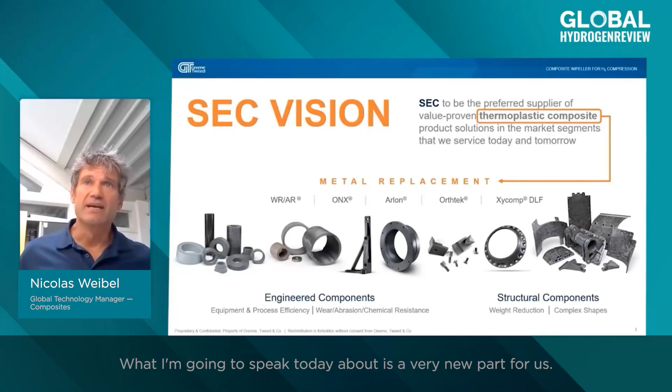I'm going to speak today about something that's a very new part for us. It's an impeller for a centrifugal compressor.

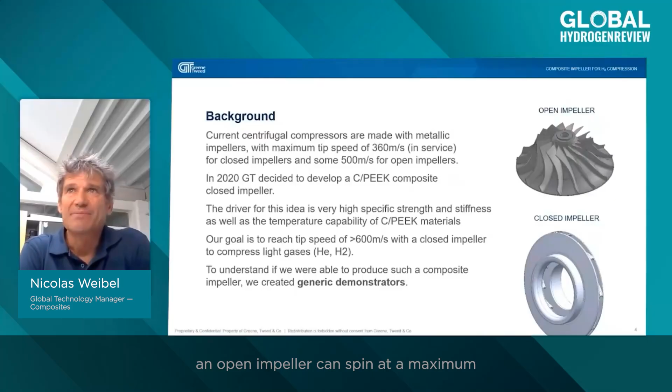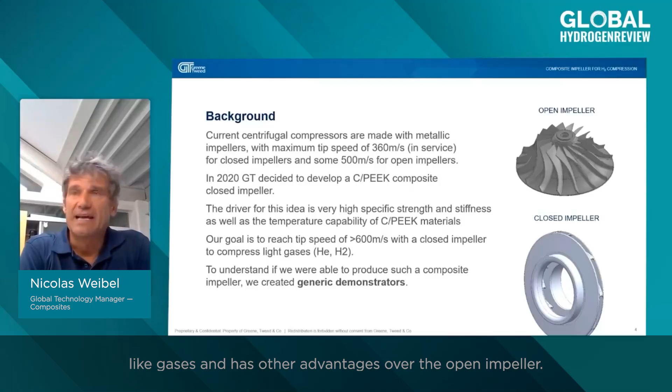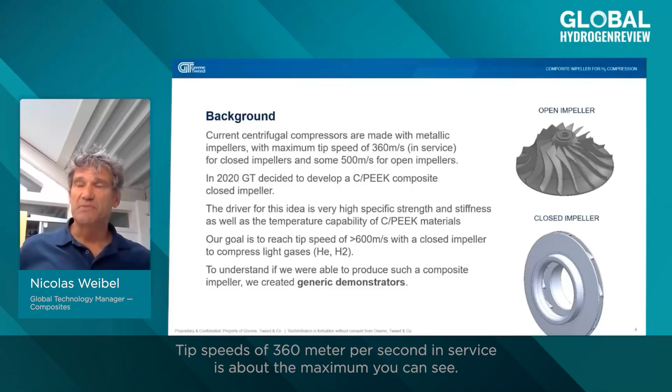Impellers today made from metals are of two different types. They are either open, as you can see on the upper right side. An open impeller can spin at a maximum tip speed, the tangential speed at the external surface, of about 500 meters per second. And a closed impeller, which is a preferred method typically to compress light gases and has other advantages over the open impeller, is also limited to lower speeds because of the added mass on the external surface. Tip speeds of 360 meters per second in service is about the maximum you can see.

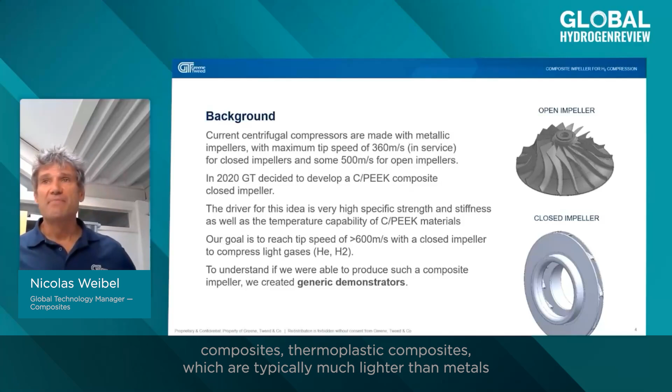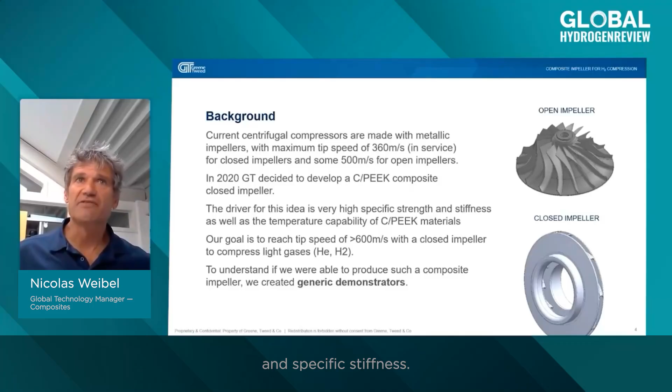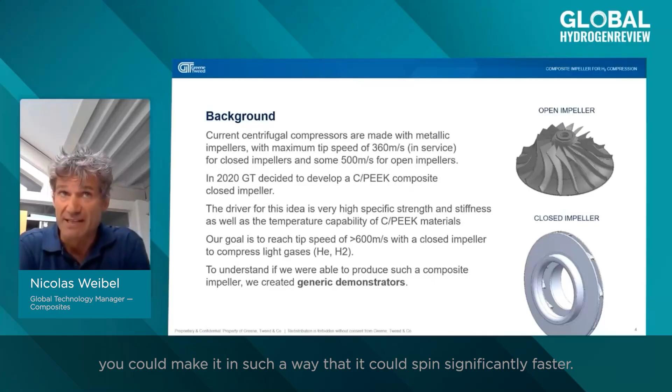We, as I said, are working with composites, thermoplastic composites, which are typically much lighter than metals and still have very high strength and stiffness. So what we're looking at is the ratio between strength and mass, called specific strength and specific stiffness, and composites have a fantastic advantage over metal. So theoretically, if you can make an impeller from composites, you could make it spin significantly faster. I will explain later why faster spinning is something we're looking for.

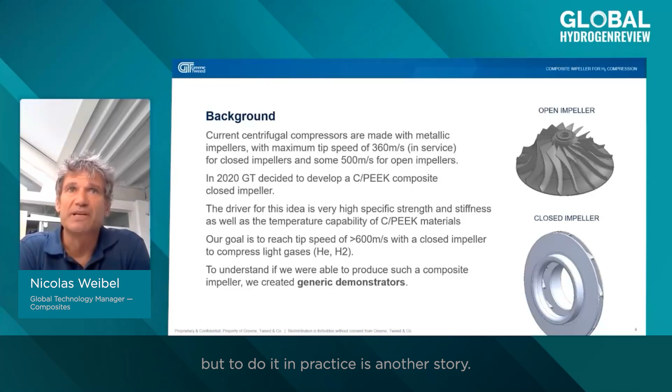So, of course, as I said, on paper this works, but to do it in practice is another story. Hence our initiative within Greene Tweed to produce this as a demonstrator, to show our customers that we can do that.

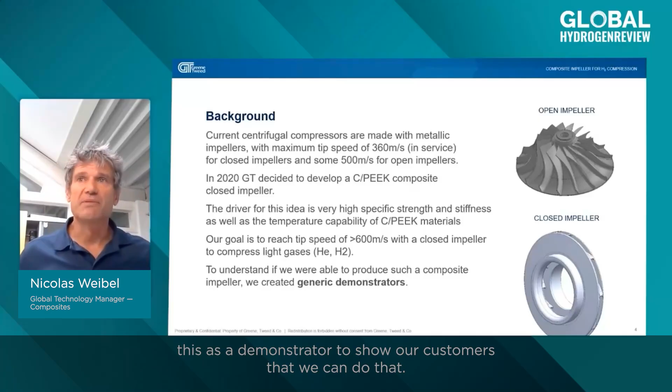The compressors used today to compress hydrogen are reciprocating compressors. As you can see on the left, they have a piston that compresses the gas, and with that any gas can be compressed. But the limitation is the amount of gas you can compress in one second. With the largest units, 8 cubic meters can be compressed per second. That sounds like a lot, but 8 cubic meters of hydrogen is only 600 grams.

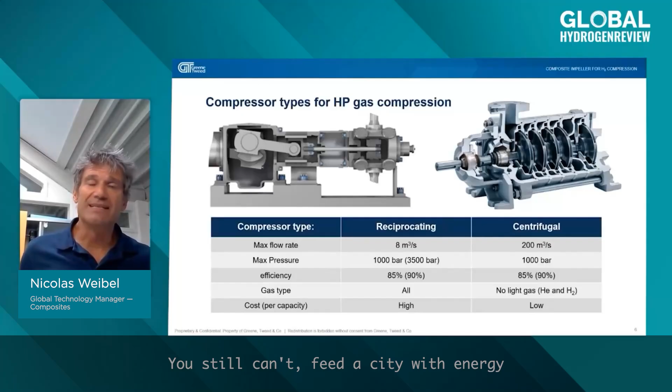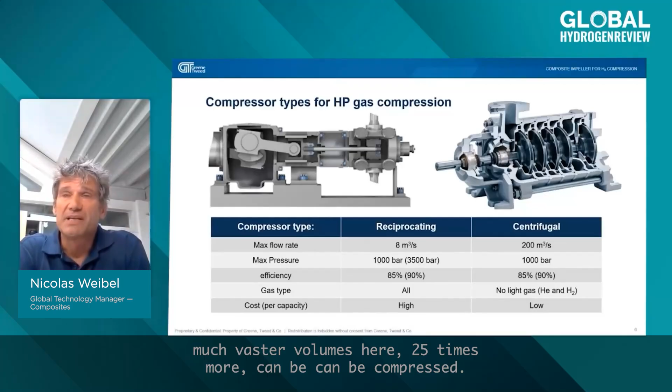And 600 grams per second is still a very small quantity of energy. Even if hydrogen has about 3 times the energy of standard gasoline, you still can't feed a city with energy if you can only transport that amount of gas. So with a centrifugal compressor, much vaster volumes, here 25 times more, can be compressed, and this is exactly the kind of technology needed to enable a hydrogen network.

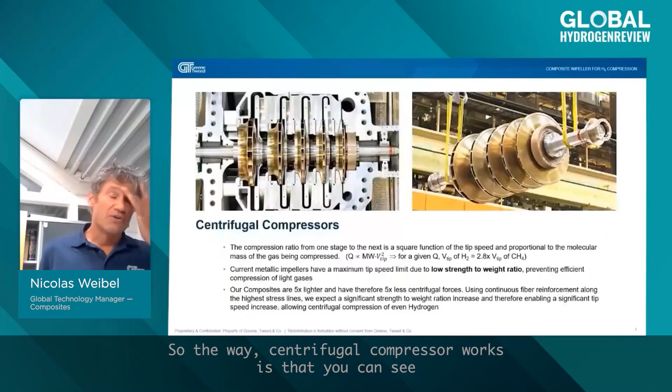I will now come to the explanation of why the faster spinning matters. The way a centrifugal compressor works, as you can see on the upper left-hand side, is that gas comes in, and then the wheel, or impeller, spins very fast to accelerate the molecule. The molecule in this 2D view is pushed up and comes back down. Of course this happens over the whole circumference, but schematically here it goes up, comes back down, and goes into the next stage.

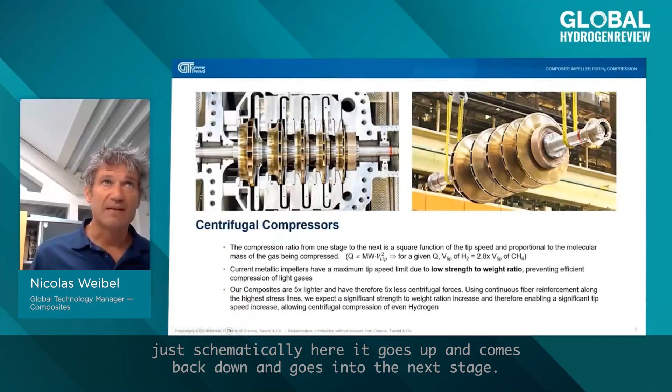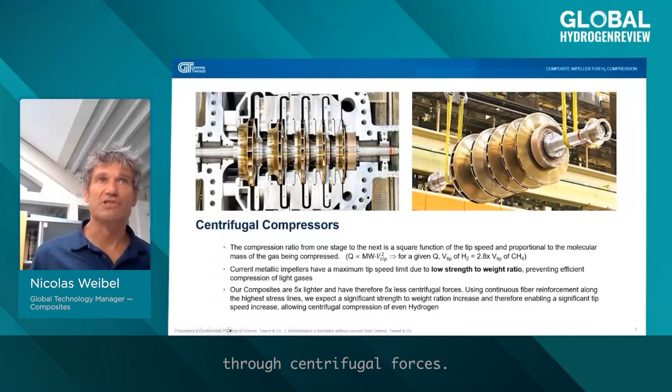Now you can see the next stage is a little bit thinner because the gas is now a bit more compressed. And then again the molecule is accelerated, pushed into the next stage through centrifugal forces. Now, if your gas is lighter, you can even intuitively understand why this molecule will have a harder time being accelerated by spinning a wheel.

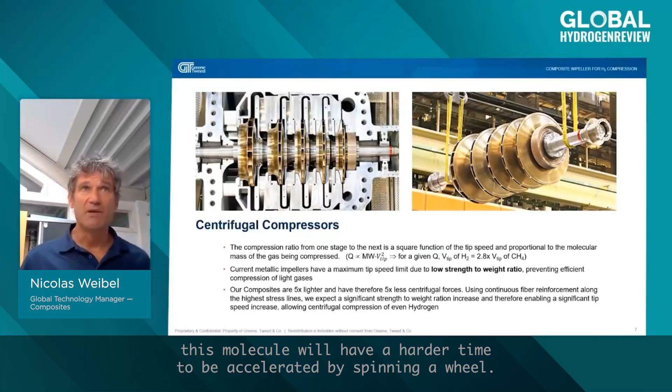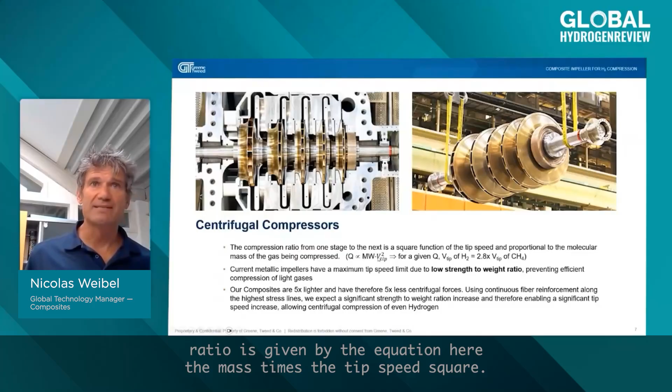And in fact, the proportionality between the mass of the gas and the speed required for a certain compression ratio is given by the equation: mass times tip speed squared. That means, for example, if you are compressing methane, which is 8 times heavier than hydrogen, you can do that with a certain tip speed. To get to the same compression ratio with hydrogen, you would need a tip speed that's the square root of 8, so 2.8 times faster.

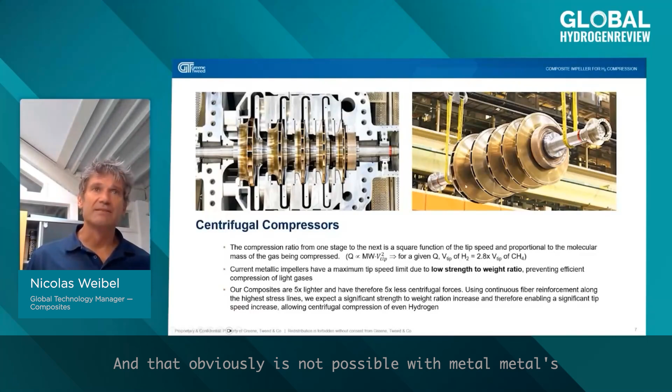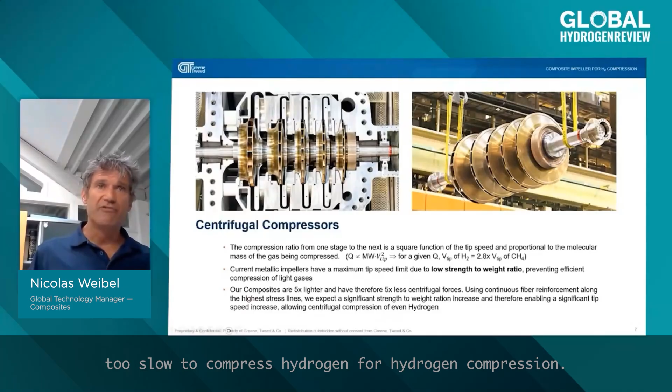And that obviously is not possible with metals. Closed impellers like this are about at the failure level at 440 to 450 meters per second. It will explode, typically into 4 pieces. And that's still far too slow to compress hydrogen. For hydrogen compression, a tip speed around 600 meters per second is required.

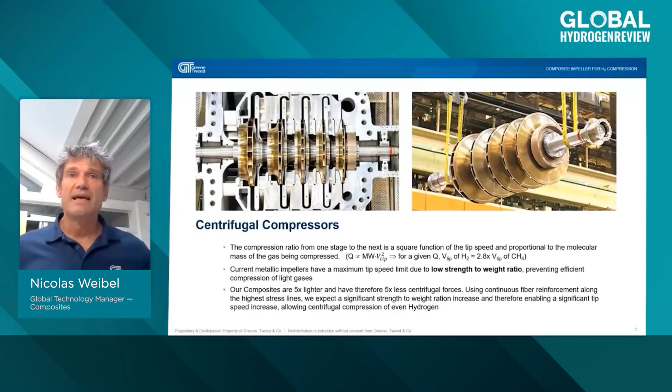As I said at the beginning, thermoplastic composites have a great advantage because of their low weight and high strength, so they have a very high strength-to-weight ratio. Compared to steels or Inconel, we're about 5 times lighter, and the strength is obviously not 5 times lower. In fact, in the fiber direction, it's even higher than metals. To make an impeller, you have to orient the fibers in a number of orientations, but overall there's still a great advantage to be expected. At this stage, a few years back, this was still just on paper.